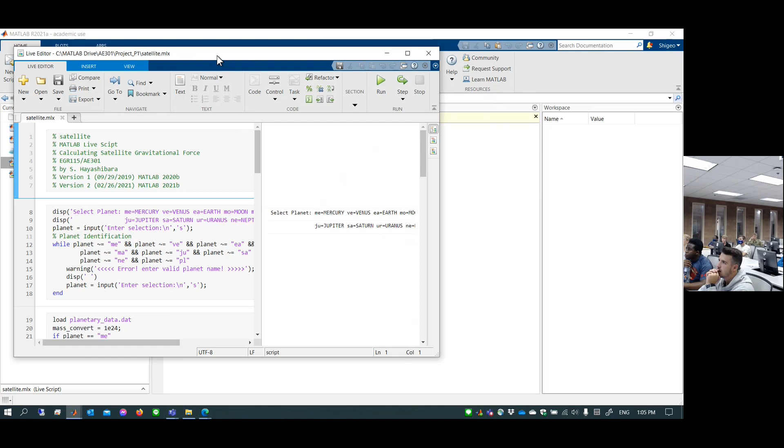satellite.mlx, this is Live Script, okay. So this is how I code it. And I'm going to undock the command window and show you side by side with the script. This computer is so damn slow. Anyways, okay, so this is the command window, this is the script side by side.

So when you run the script, basically the command window says enter selection. The selection is Mercury, Venus, Earth, Moon, Mars, Jupiter, Saturn, blah blah blah. Okay, yeah, so I'm going to choose something, maybe Earth, EA, hit enter.

Next, okay, so what is the mass? I don't know, 5,000. What is the unit? Unit could be, what is units around? Kilogram, slug, or pound mass, okay. So I'm going to enter kilogram.

And then satellite altitude is, I don't know, it could be 7,000. I can put in feet. I can intentionally mix up those two units, I can do that because it's a computer. And then 7,000 feet is low, all right, that's really low. 7,000 feet? No, it's not satellite. I'm sorry, well, kilometers, okay, sorry, 7,000 kilometers. I'll stick with this unit.

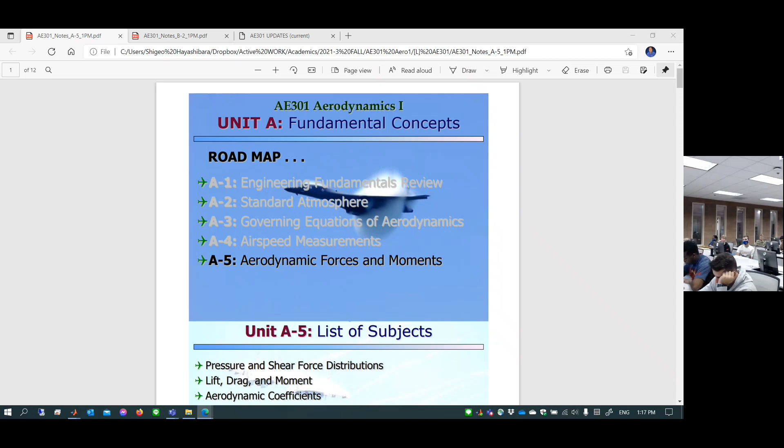Today we are going to finish up A5, and then hopefully get to some questions if you have them on unit B1, which is the YouTube lecture, and then we get into B2. In unit A5 we introduced the coefficients of aerodynamics, and since you worked on quiz 6, you know why we need to work with coefficients.

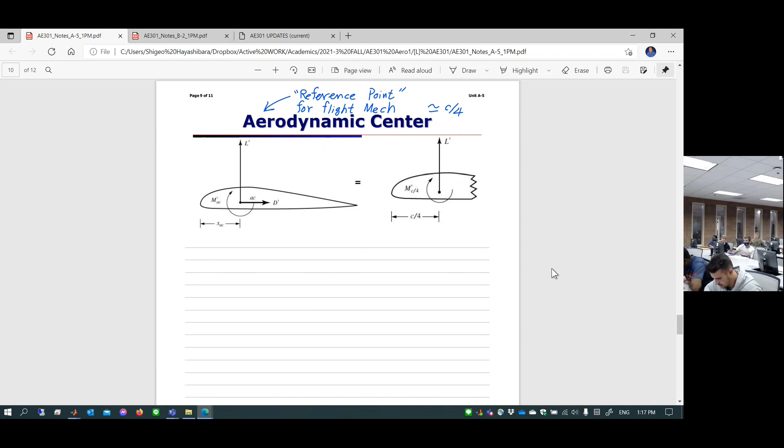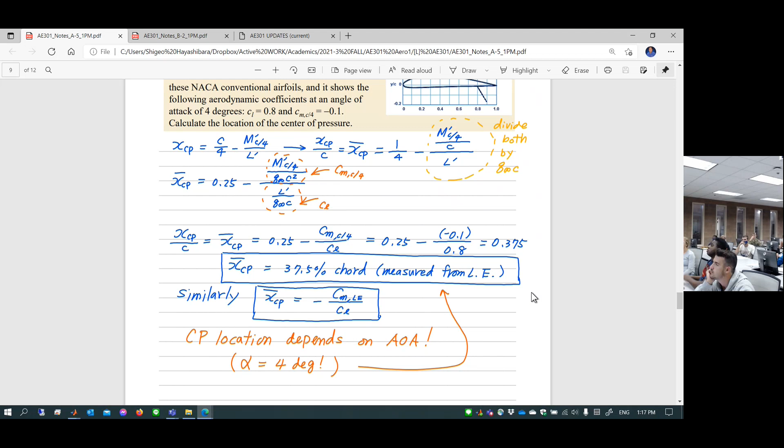Everything is dimensionless, of course. We're not going to talk about anything that comes with dimensions. The reason is, oftentimes we test something in small scale to predict larger scale performance, which requires similitude. So please properly understand why people use Reynolds number, not airspeed. You need to understand why people use Mach number, and why they talk about drag coefficient, not drag itself, or lift coefficient. It's not a location, it's a percent location from the leading edge of the chord. Everything is dimensionless for a reason—we have to make it independent of size.

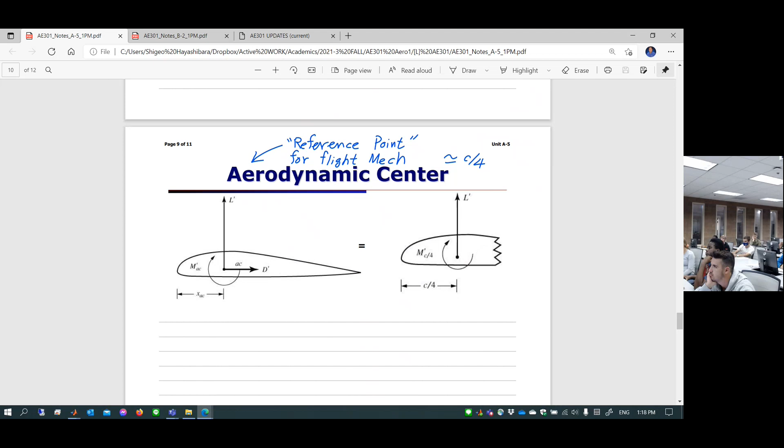So today we talk about the aerodynamic center instead of the center of pressure. Why do we need such a thing? Can anybody summarize what we did in the last class? Why do we need the aerodynamic center?

Go ahead. The center of pressure depends on angle of attack. The aerodynamic center doesn't. The aerodynamic center is a fixed position depending on the cross section, and it's almost always quote-unquote fixed.

So we want a fixed reference point where you put your resultant force, in this case lift. This is a resultant, and you can put the resultant force anywhere along the chord—it's your freedom. When you pitch up or pitch down an airplane, it creates lift and drag moments, which are not single point values. This is a resultant we're talking about. Pressure is distributed over the surface, and as a result you create force in this direction, force in that direction, rotating around a certain fixed point. That is what we are talking about.

So you can place lift in any location if you want to. But hopefully that is the fixed point, because that's where the lift is generated. Suppose airplane center of gravity is around here. If you increase the angle of attack, lift is increased. That's going to create a pitch up tendency around the center of gravity. That is going to be the control mechanism of your airplane.

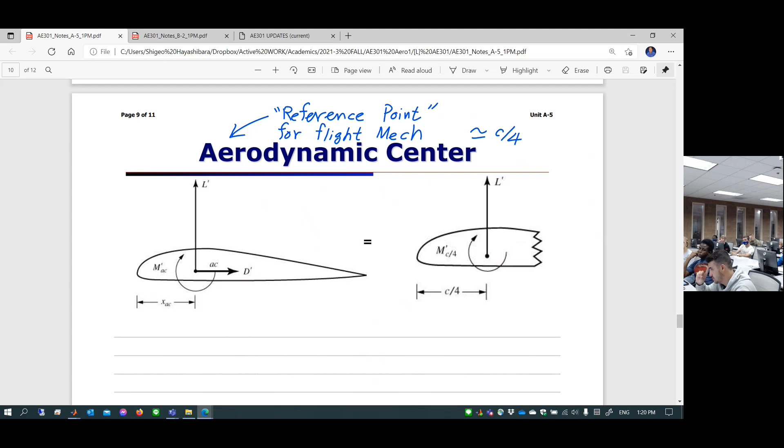So now we are going to do the exact same practice here. We did the same practice in the previous class. I have two models of airfoil, where you place your lift and drag at the aerodynamic center location, measured from the leading edge. This is aerodynamic center, XAC. And then you happen to put lift and drag, well drag is missing, but let me just add it. Drag is acting here too. It probably doesn't mean much, but drag here.

So lift and drag placed in quarter chord. Obviously you're going to expect quarter chord moment per unit span developed at the quarter chord. So those two are, again, equivalent.

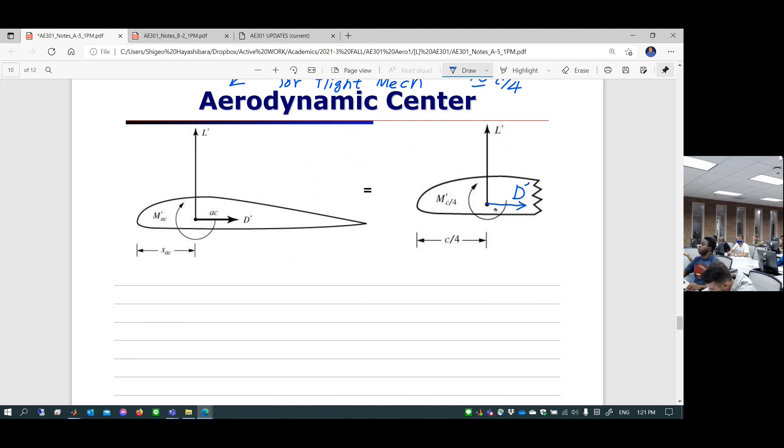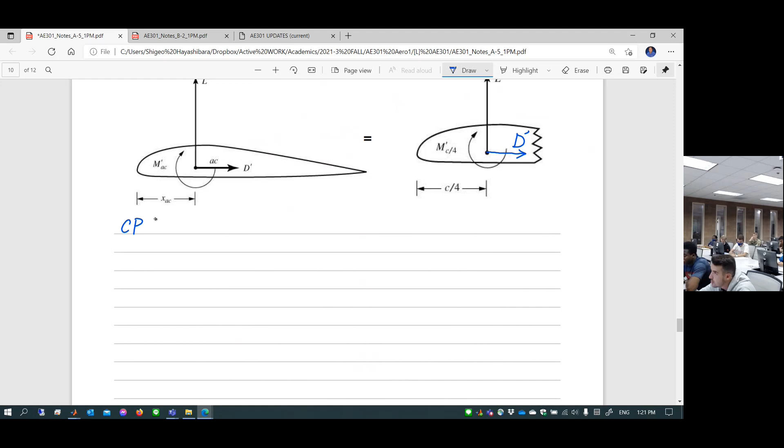Okay, now first of all, let's define what is the aerodynamic center. This is the formal definition. What is this location anyways? Now, do you remember the definition of center of pressure on the previous page? Let's begin with that. Center of pressure, what is the definition? What kind of location is that?

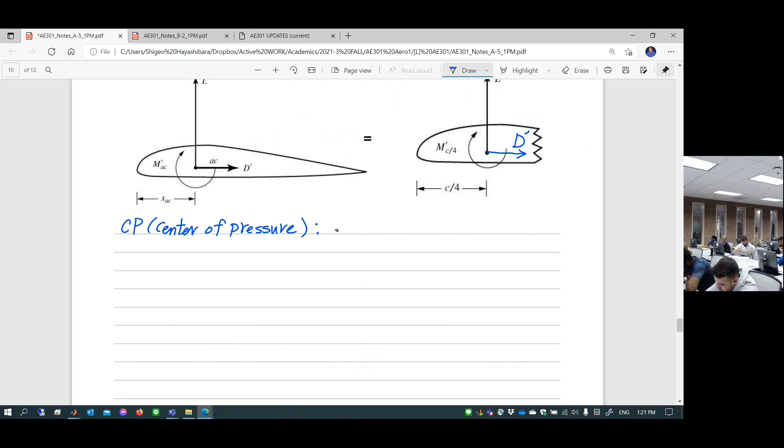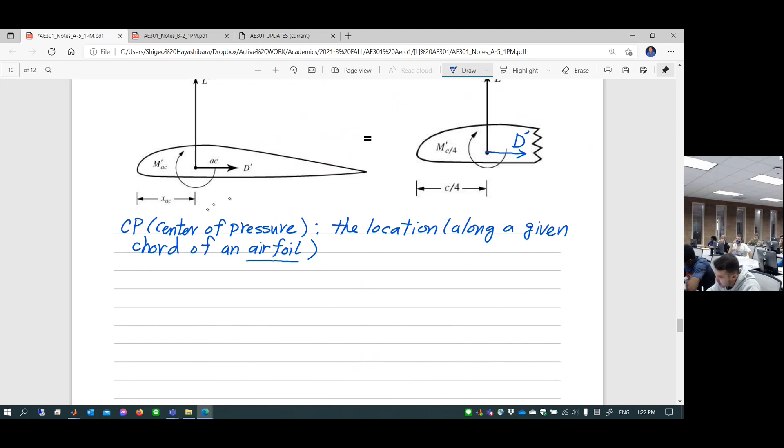So as I define center of pressure, this is the location, of course, along a given chord of an airfoil. In this case, I'm going to limit my discussion for airfoil. Now we are going to talk about wing. If we talk about wing, you have to come up with what is the average chord, mean aerodynamic chord. You have to find out those things. But anyways, this is airfoil, so cross section is constant, and then it's a unit span of a constant cross section. Anyways, that's airfoil. So the location along a given chord of an airfoil where pitching moment is 0. That's what it is, right?

This is quite important, formal definition of center of pressure. So mathematically speaking, you can say moment per unit span taken at the center of pressure, what is it? Zero. And then if you convert it to Cm center of pressure, what is it? Also 0. So this is the definition of center of pressure.

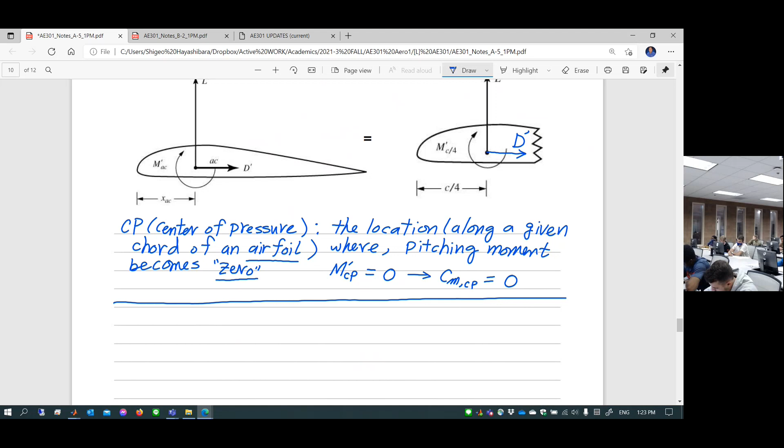However, the problem is this actually moves back and forth with respect to the angle of attack. So it's not the fixed position. So we cannot really use it as a reference point. So aerodynamic center, the desire we have here is, hopefully this is fixed location.

Aerodynamic center. Now, by the way, aerodynamic center of an actual 3D airplane is called the neutral point. It's a different word, but it's the same meaning. Neutral point. If the neutral point is forward of the center of gravity, does it make the airplane stable or unstable? Unstable. That's right. So how much distance apart between the neutral point and the center of gravity is essentially the static margin, SM. That's something you have to design for your actual airplane.

This is actually an aerodynamics class. We're not going to cover those things, but it's flight mechanics content. We'll talk a little bit about it, not so much. So what is the aerodynamic center?

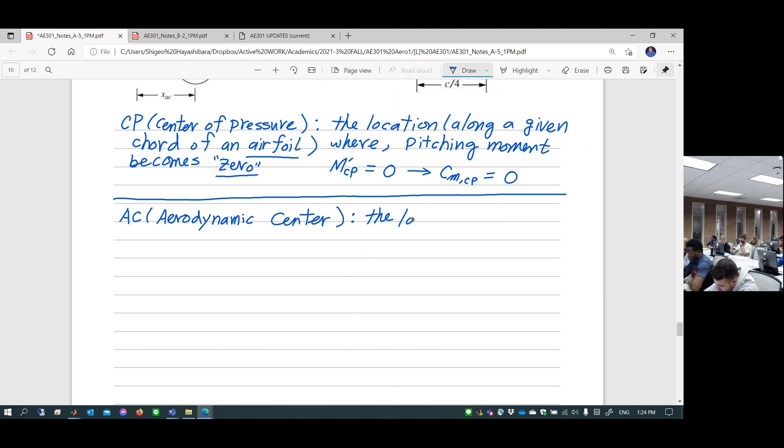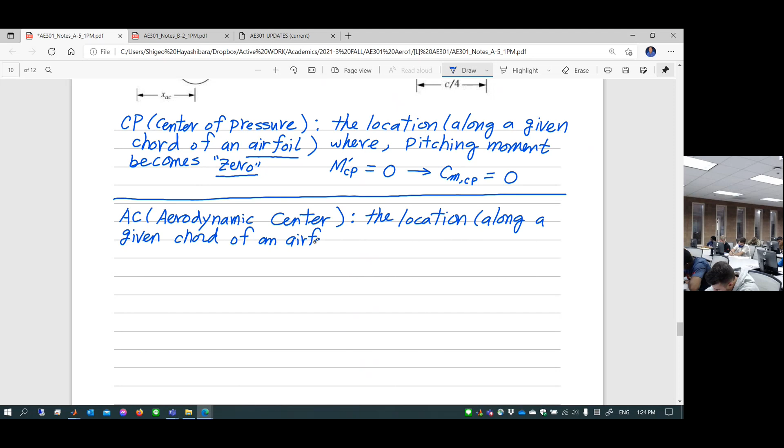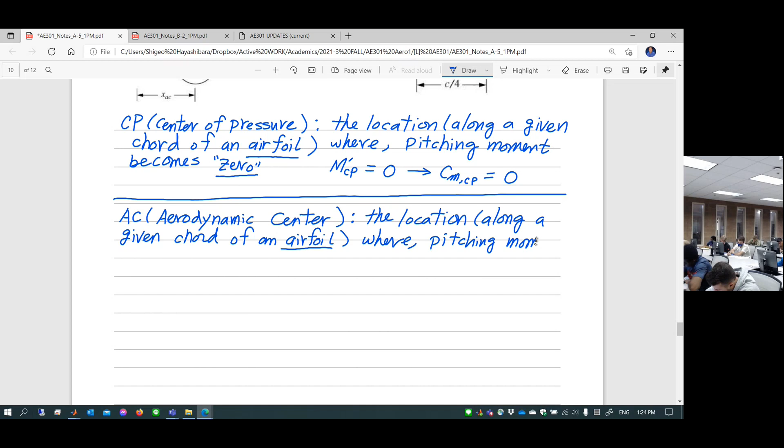This is the location, once again, along a given chord of an airfoil where pitching moment becomes independent of angle of attack. This is the location, fixed point. In other words, this is the location that if you pitch up or pitch down and change lift coefficients, the moment doesn't change at that point.

Mathematically speaking, if you take a moment at the aerodynamic center, what's this? Some kind of constant, because moment doesn't change. That means if you take the moment coefficient taken at the aerodynamic center, that is constant.

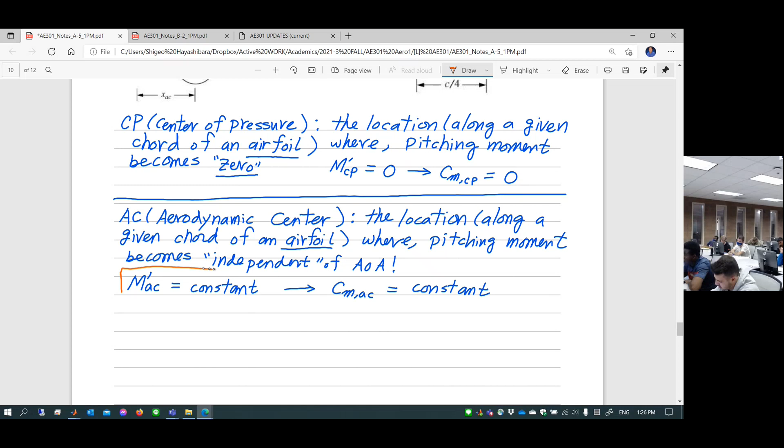This is quite an important definition of aerodynamic center. Please remember that. Now, important thing is, I'm saying this is constant, right? This constant could possibly be 0. 0 is also one of the constants. So is there any possibility that aerodynamic center could also be center of pressure? Yeah, it's possible. We are going to see those kinds of cases later by looking at the real data set of 1950s.

Those are the very important differences between center of pressure and aerodynamic center. I think I can almost guarantee this is going to be on the exam. If you don't know this kind of thing, I'm not going to pass you. This is very fundamentals of aerodynamics. If you don't know this, you shouldn't design airplane.

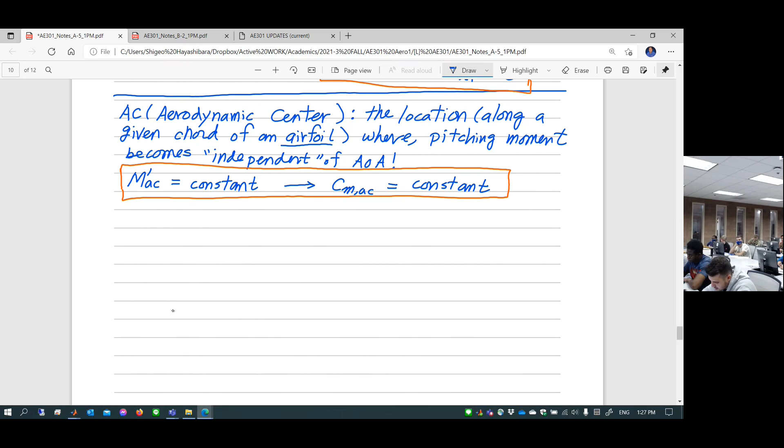Okay, so let's move on. We're going to find out location of the aerodynamic center in the very exact same way that we did in last class. Let's take a look at the left figure and right figure. Okay, go ahead, question.

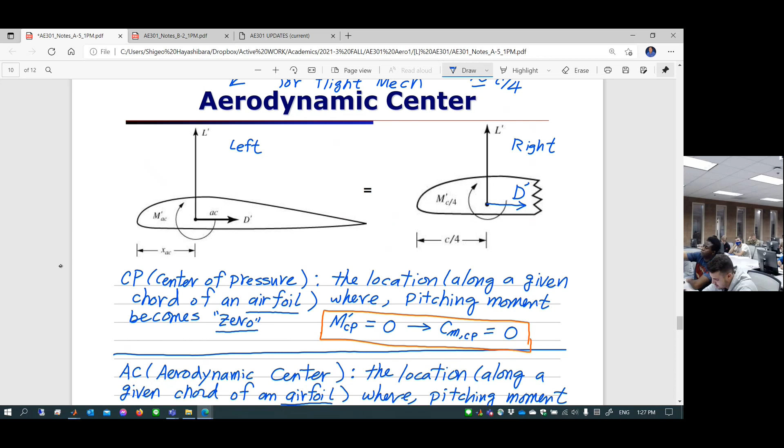Yeah, that CM is center of mass, right? Huh? The CM. What? What are you talking about? This is a moment coefficient. At the aerodynamic center, this is a moment coefficient of center of pressure. Oh. If you're talking about center of mass, is that center of mass you're talking about? Yeah. Center of mass is usually CM capital, center of mass. But we're not going to use center of mass for airplane, you know that? Center of gravity we use. Center of mass probably doesn't show up in here. I think. Anyways, let's move on.

Any other question? But actually, I appreciate that kind of question. Basically, sanity check. You're completely off the tangent kind of thing. Okay. CM is moment coefficient.

Okay, so let's do the exact same thing. You're going to take a look at right figure and left figure. What did we do in last class? We checked how much moment is developed at leading edge, right? So left figure, what kind of moment you expect? Of course, already have moment developed at the aerodynamic center, M prime AC plus or minus, which one? Minus XAC times L prime is going to give you pitch down moment. So those two things added together is going to be total moment developed at the leading edge, right? So we are going to do the same thing.

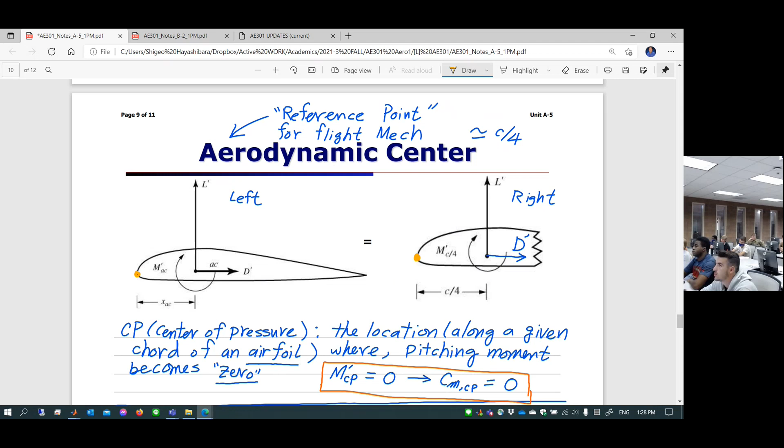So, considering, you're going to talk about the moment developed. It could be any location, but I choose like a leading edge because it's so convenient. Developed at the leading edge.

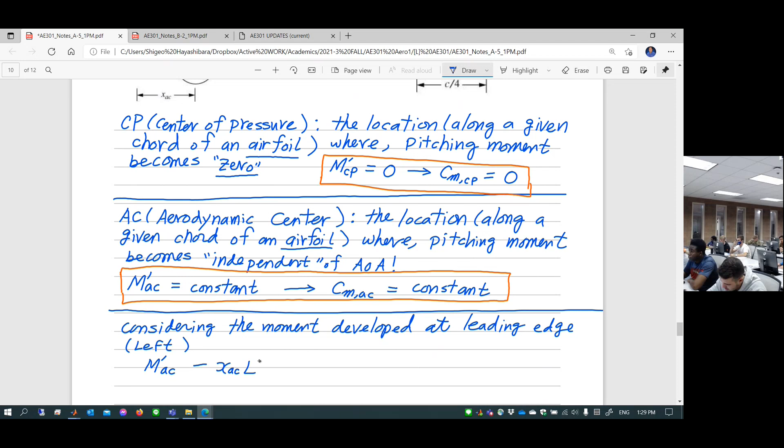So left figure, it's basically left figure as M prime AC. This is aerodynamic center moment per unit span developed already. This is positive pitch up moment. And then lift is going to create the pitch down moment. So this is going to be minus XAC times L prime, right? So those two added together is going to be the total moment developed at the leading edge on left figure, which can be equal to the right figure.

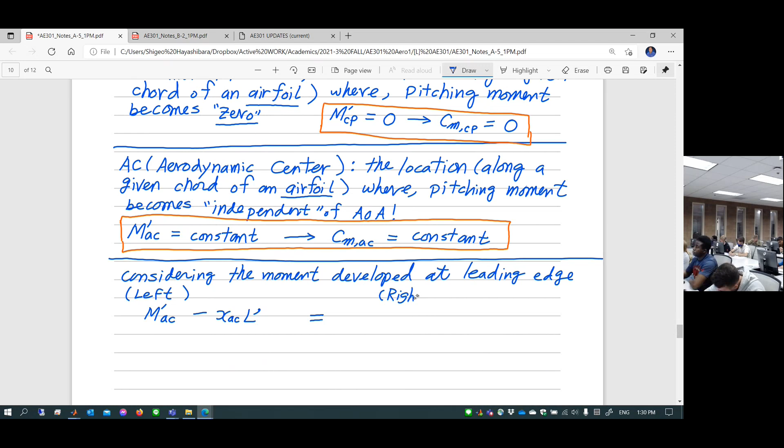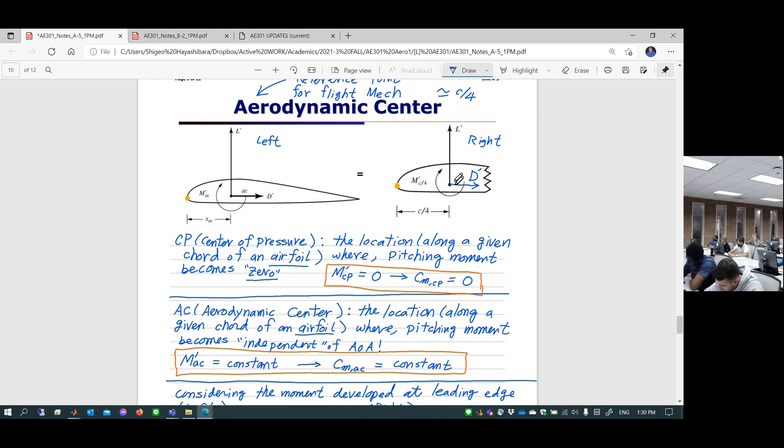Let's take a look at right figure once again. Zoom out. So right figure here, obviously the same thing, moment at the quarter chord per unit span, and then this lift creates the pitch down moment. So you can say that moment at the quarter chord per unit span minus quarter chord times lift per unit span. Do you follow that?

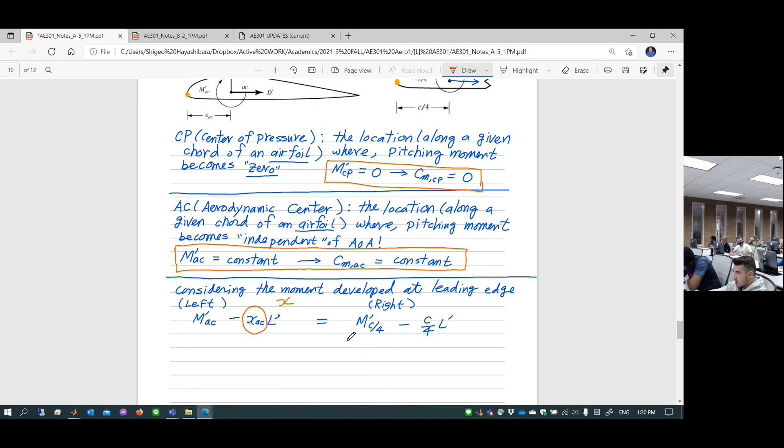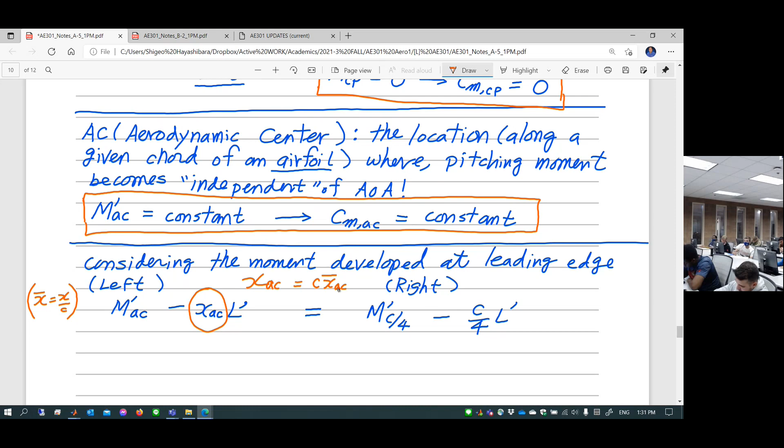Okay, so let's replace this XAC, okay, XAC. So XAC, let me just zoom in a little bit. XAC is equal to chord length times X over bar AC. Do you follow that? X over bar is equal to X over C in general. X over bar is a normalized coordinate as we introduced here in last class. So I can express XAC by chord length multiplied by X over bar AC. Do you follow? Yeah. Okay, let's do that.

And so now, you can say M prime AC minus, this is C times X over bar AC times L prime, which is equal to M prime quarter chord minus quarter chord times L prime. And then you're going to solve this for M prime AC. So this is aerodynamic center moment per unit span, which is equal to lift per unit span multiplied by chord length times XAC over bar minus C over 4 plus M prime quarter chord. Okay, so far?

Next, I want to do something... I'm going to massage this equation. I shouldn't use that kind of word, but my old math professor used to say 'let's massage this equation.' What do you mean massage?

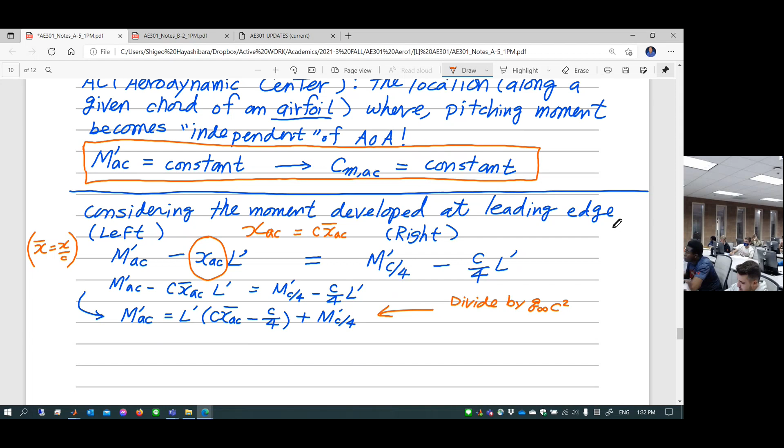You're going to divide by Q infinity C squared for both sides. Let's do that, and I'll change it to green. So the left-hand side is M prime AC divided by Q infinity C squared, which equals L prime divided by Q infinity C. One of the C's cancels out, so this becomes X bar AC minus 1 over 4.

So one of the C's is going to divide through this term and then this term, already. So plus this is M prime quarter chord divided by Q infinity C squared, and then you probably stop and think, wait a second, what the heck is this? And what is that? And what is this? Anybody?

This is moment coefficient, Cm at AC, right? What is this? Lift coefficient, CL. What is this? Moment coefficient, of course, Cm at quarter chord.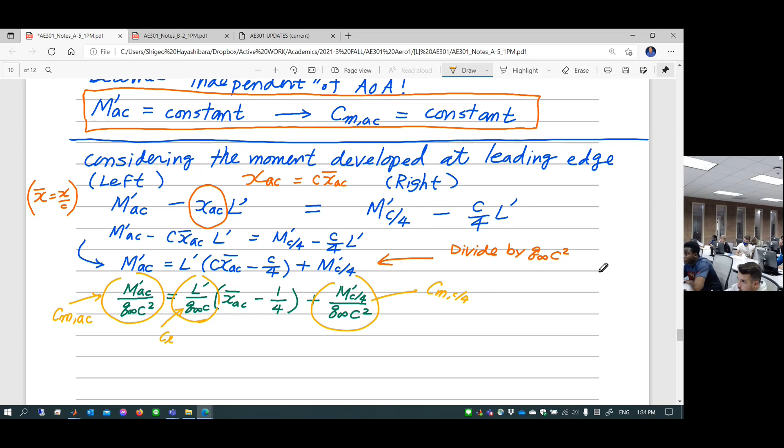Isn't it better to just put the C in? X bar AC and C over 4? Because you haven't distributed yet. Does that make sense? You are dividing both sides by Q infinity C squared. This is Q infinity C, but the other C is already cancelling out this C and this C, right? Does it make sense? I hope so. I'm kind of cutting through one line, but I hope you understand.

So equation-wise, this is Cm aerodynamic center, which is CL times X bar over AC minus 0.25, that's 1/4, plus Cm quarter chord.

Now, next thing is I want to do one more. From this equation, I want to differentiate. You have an allergic reaction for differentiate? Differentiate means you're going to basically chop things down into small segments to see how it behaves. That's differentiation. Integration is the opposite, piecing together small tiny pieces to see what you can create out of it.

If you start thinking physically, not mathematically, you probably don't have an allergic reaction because it makes more physical sense. As an engineer, you have an allergic reaction against math because math is all virtual, nothing real. But you're going to crystallize how math becomes something real in this class, I hope. I used to have a huge allergic reaction against mathematical things, but I hope this class changes your mindset. Math is your friend—you're actually going to create something real out of it.

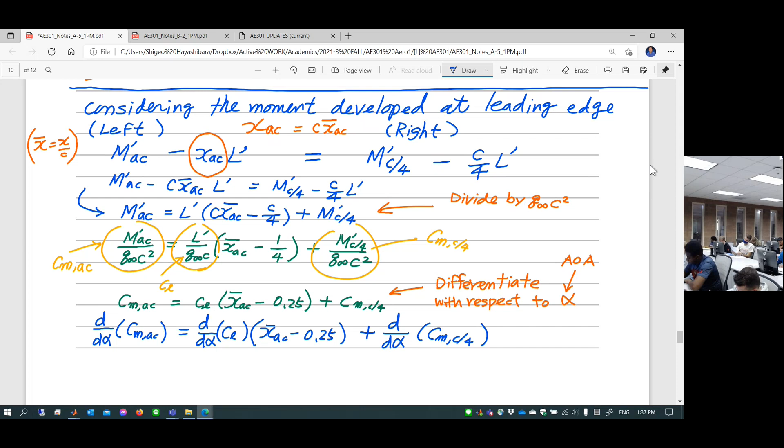Okay, so let's remember the definition of aerodynamic center. Somebody please remember the definition—it's independent of alpha. That means if you take d/d alpha of CM AC, what's this? It's 0, because CM AC doesn't depend on alpha. So if you take the differential with respect to alpha, this is 0. That's the definition of the aerodynamic center.

Now, we're going to define this thing: DCL/d alpha. We're going to call this CL alpha. If you take airplane control or flight mechanics, you're going to see lots of this kind of thing—CL alpha, CL beta, CL gamma, something like sideslip. Anyways, we're going to temporarily call this A0. We're going to define that. This is called the lift curve slope. Have we heard of it?

Very, very important. And also we're going to define this: D Cm quarter chord / D alpha, which is actually Cm quarter chord alpha. We're going to use M0, okay? We're going to define those terms—one is the lift curve slope, this is the quarter chord moment curve slope.

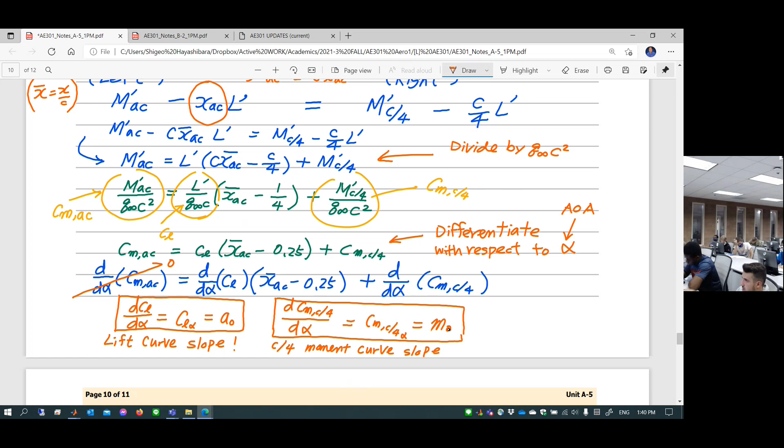That's little m, right? Little m, which one is it? Equal to your M0, little M0. This is A0, lift curve slope. Quote-unquote moment curve slope. I'm running out of space, but anyways.

Using those definitions, you can rewrite this equation. So this equation now becomes: 0 equal to A0 times x over bar AC minus 0.25, plus M0. So from here, the conclusion: location of aerodynamic center, x over bar AC, is equal to negative M0 over A0 plus 0.25. This is a conclusive equation for the location of aerodynamic center. Sorry, I'm running out of space.

Go ahead. And because the aerodynamic center is almost always at quarter chord, does that mean that M0 is approximately 0? M0 is very small, you can expect that. Yes, that's correct. And as a matter of fact, if it's a thin airfoil, it's 0, actually very close to 0.

So first of all, let's understand what is the meaning of lift curve slope and then moment curve slope to begin with. Okay, let's move on to the next page. Take a look at this example.

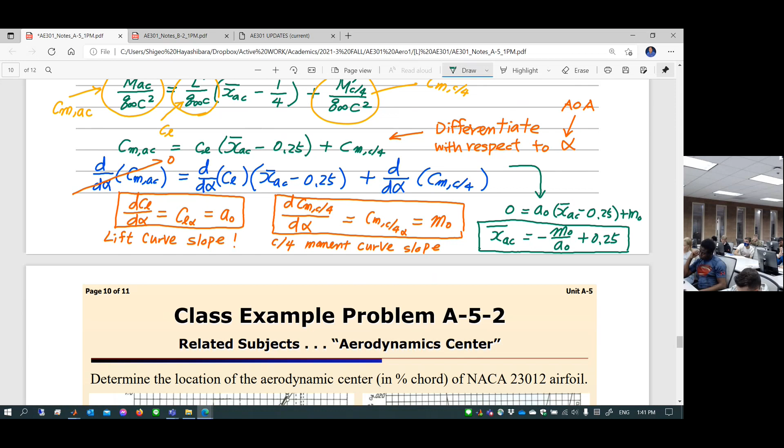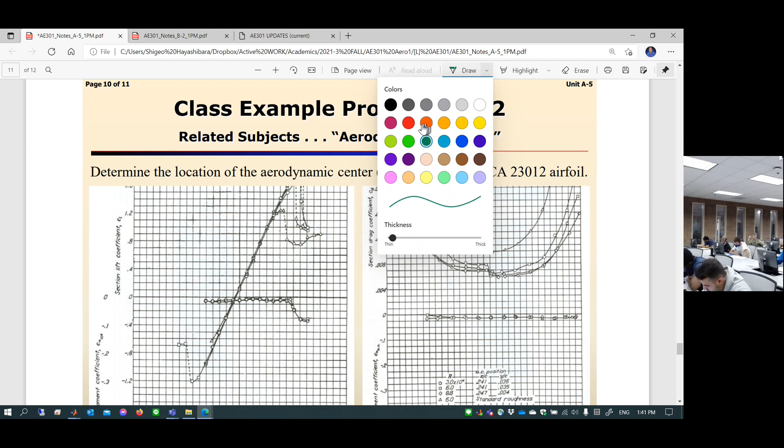The next page example says: determine the location of the aerodynamic center in percent chord of the NACA 23012 airfoil by looking at this data set. So you can say there are two data sets. One of them, of course, is to find out what is A0, the lift curve slope. Lift curve slope, you can look at the left figure here.

This is a plot of two things. One of them is this plot. This is a series of the same kind of plot, it's just a variation of Reynolds number. So they repeated the same kind of test with lots of different changes of Reynolds number.

So the data of the circle, square, diamond, triangle—those are essentially different Reynolds numbers. Those two are the same Reynolds number, but one is a different roughness of the surface. So they simulated the rough surface also, smooth surface versus rough surface, trying to see the difference on the boundary layer formation.

Now, anyways, this is the plot, called the lift curve plot. So this is the plot of angle of attack against lift coefficient. One thing you noticed was it's almost linear, isn't it? It's a straight line. So if this is a straight line or linear function, you can determine the slope of this line, is that correct?

Yeah, so this is A0. A0, like I said, by definition, is how much CL is expected for the change of alpha—DCL/D alpha. This is lift curve slope. If it's a linear function, you can determine it by choosing two locations of CL and two locations of alpha, assuming those are straight lines.

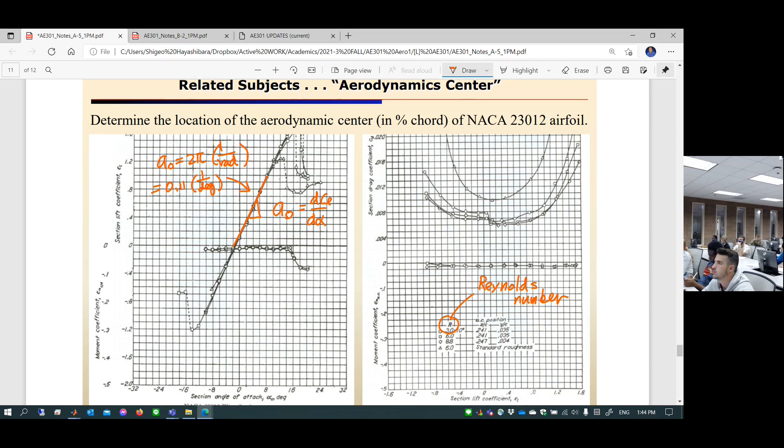And what about the other one, M0? M0 is, again, this is the plot of the moment coefficient against angle of attack. Do you think this is also a straight line? It's fairly flat, however it's a straight line almost, right? So I'm going to change the color here.

M0 is the so-called moment slope. Looking at this line, assuming it's almost straight, what is the slope? M0 is how much change of moment is associated with the change of alpha - DCM over d alpha, the moment curve slope. Again, it's very flat, meaning it's a very small value, almost zero. That's why it's almost always the aerodynamic center.

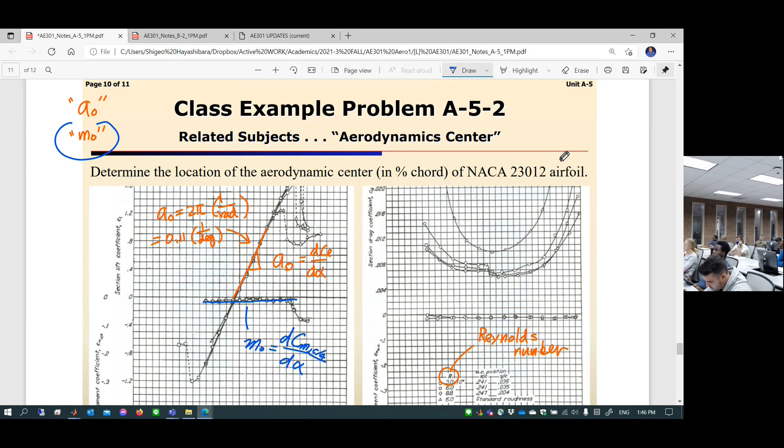Now suppose this starts to go down, with more slope, if you introduce camber and thickness. That actually changes the location of the aerodynamic center slightly forward, but not by much. This is a fairly thin cross section - NACA 23012, 5-digit, slightly cambered. Still, this is almost flat.

So let's finish this exercise. We are going to read off the values. First, let's read off A0. By definition, A0 is DCL/d alpha. Let's assume this is a linear function, delta CL over delta alpha. You're going to choose two different locations of alpha - let's say 8 degrees and minus 8 degrees.

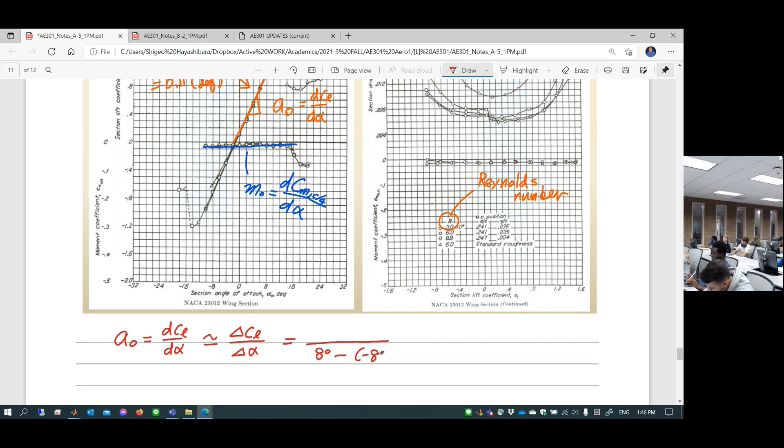You can choose any two locations. At minus 8 degrees, what is the CL? About minus 0.7 - minus 0.74, I got. That's fine, good enough. How about 8 degrees? Close to 1 - not 0.1, the higher one. I got 0.99, that's okay, 1 is fine. So you are going to compute A0.

0.1081. The unit is per degree, isn't it? Because this is a coefficient, unit-less, and this is degree. So the unit is per degree, inverse of degree.

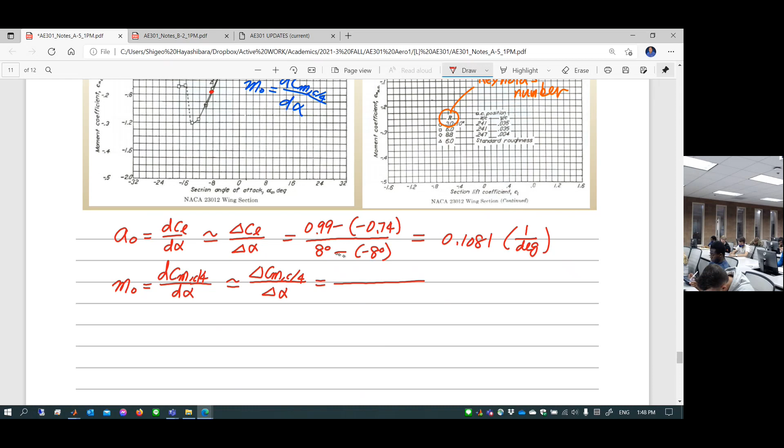Now what is M0? Once again, DCM over d alpha, where we assume a linear line - delta CM divided by delta alpha. It's tough to read off the values. You're going to read off right here and right here over this scale. Be careful, don't use this scale - this scale belongs to CL. This scale is CM. Be careful, lots of people actually choose the wrong scale. Don't do that. So look at your notes and give me values.

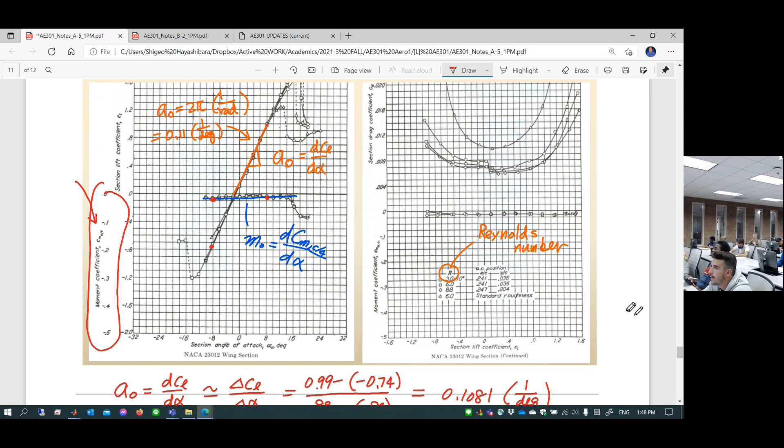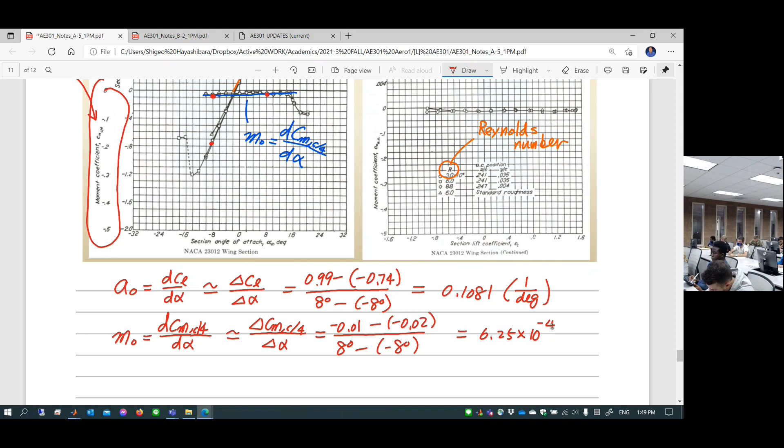At 8 degrees and minus 8 degrees - at minus 8 degrees, what's the value? Minus 0.18... minus 0.02, I got a similar value. How about 8 degrees? Slightly less negative - minus 0.01. Okay, so this gives a very small value, but anyway, 6.25 times 10 to the minus 4, again per degree. It's fairly close to zero, which means the aerodynamic center is very close.

X AC over bar is minus M0 over A0 plus 0.25, where M0 is 6.25 times 10 to the minus 4, and A0 is 0.1081. You just picked 8 degrees and minus 8 degrees as arbitrary points - you can choose any range suitable for your application. Between minus 8 and 8, we assume it's a straight line. If you compute this, you get 0.244.

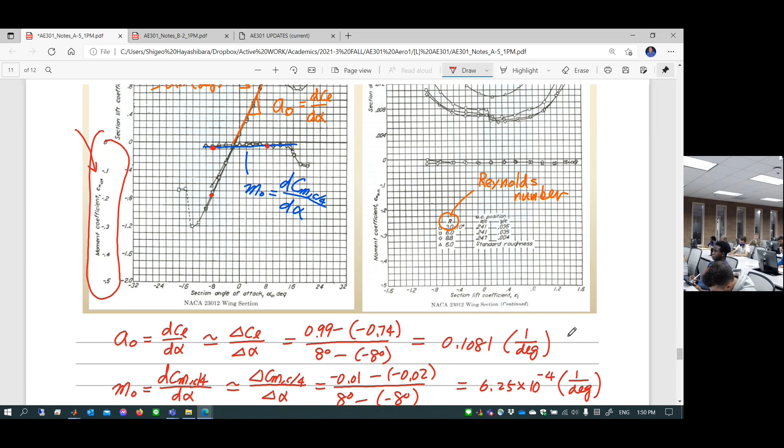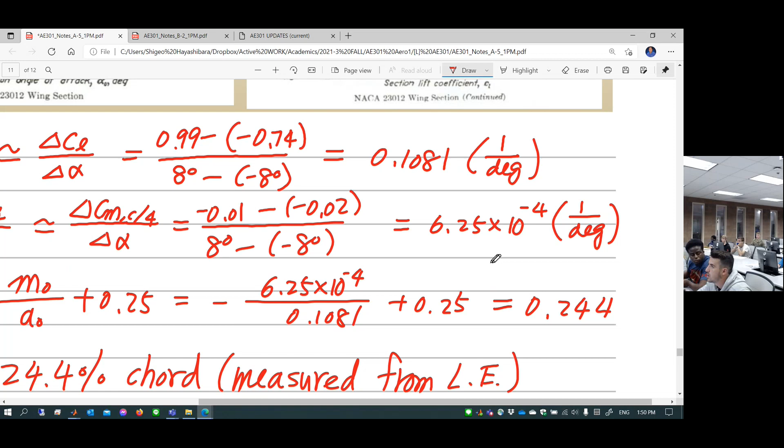So this is 24.4% chord location measured from the leading edge. Is it the same as if this is given already? This aerodynamic center position is already given here as a data set. Is it close enough? Yeah - 0.244 I got, versus 0.241 to 0.247-ish depending on the Reynolds number. So this is the actual measurement, compared against your computation of 24.4% chord measured from leading edge.

So this is the location of the aerodynamic center, very close to quarter-chord, but slightly shifted forward. Okay? Question?

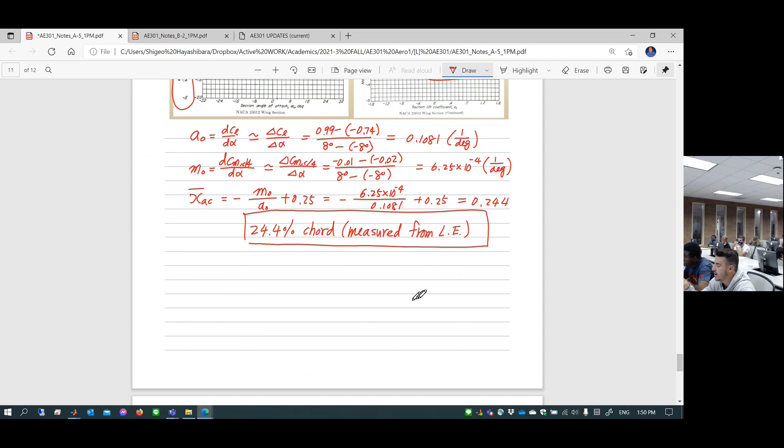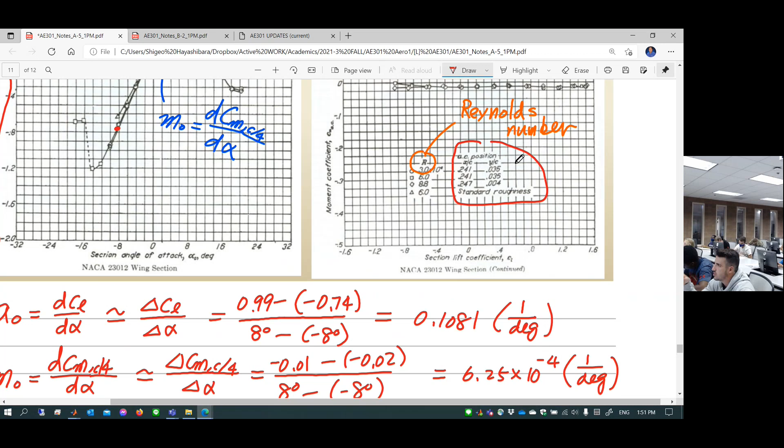When you look at the graph and it gives you the X bar, what is that, what's the Y bar? Where you circle over there - what's the numbers on the right, is that the vertical position? Vertical position, yes, that's right - leading edge.

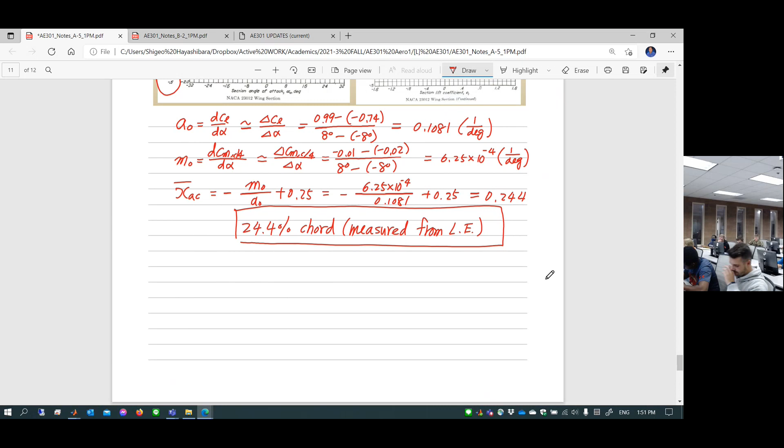The 0.25 in the equation never changes, correct? Yeah, it's 1/4 - it's in the original equation.

So again, next page, please look at it yourself. This is flight mechanics - the meaning of why AC is chosen, not the center of pressure.

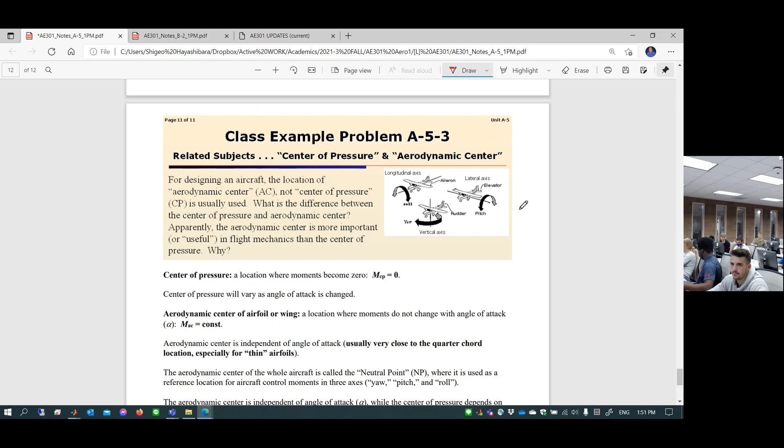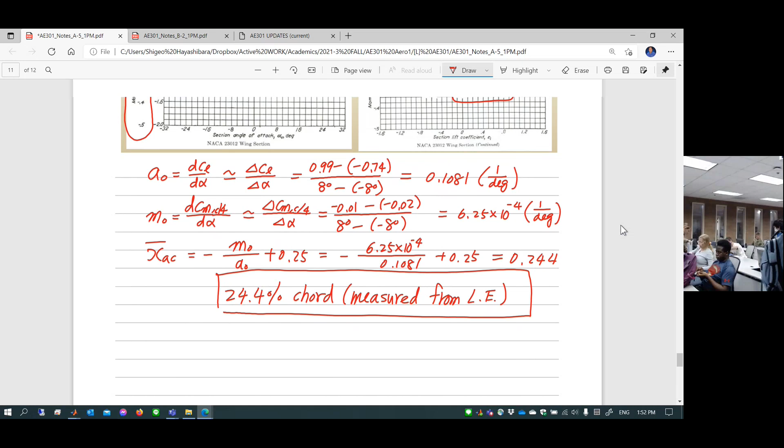Can you scroll up for a second? Or scroll down? Yep. Sorry. No worries.

So for my code, I have it set up so that in the beginning it asks you if you want to use SI or customary units when you enter in. I'm good, thank you.